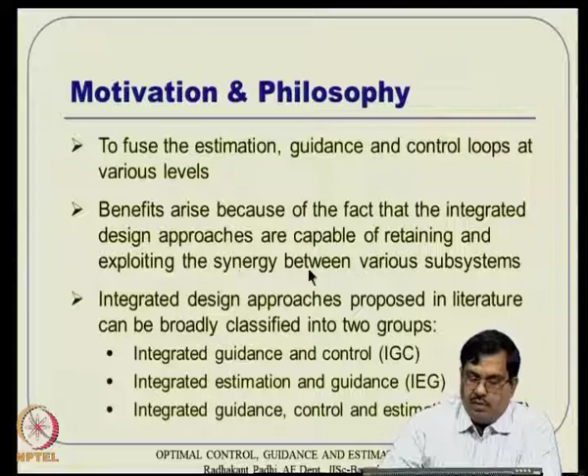So the motivation and philosophy is like this. What you are interested in is to fuse the estimation, guidance and control loops at various levels, and benefits arise because integrated design approaches are capable of retaining and exploiting the synergy between various subsystems. Ultimately it is finally one system. If you separate it out and put estimation, guidance as separate subsystems, everything has to act on the same system finally, and if you do not exploit the synergy between them, unnecessarily there are transient effects, large delay effects, things like that. So can we suppress some of those by invoking some of these concepts?

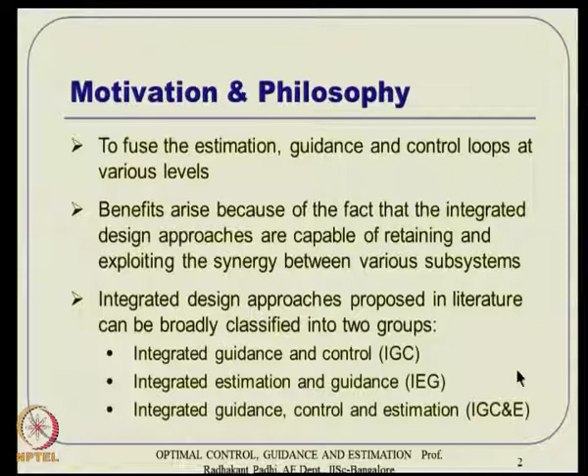So the integrated design approaches proposed in literature can be broadly classified into two groups, primarily integrated guidance and control, or integrated estimation and guidance. There are also concepts of integrated guidance, control and estimation together, and popularly some people call it IEGC, and some people call it IGC and E - integrated guidance, control and estimation. Anyway, so the concept is more important.

So let us see what is going on here. Typically, and these are largely in the context of missile guidance, though you can talk about other systems as well - we have actually experimented some of these concepts of IGC in UAVs and all that, but here the primary focus will be on missiles. So when you talk about missile guidance and control, you also need some information about the target. That target information is typically captured either through radar or seeker, so we have some sort of a target estimation loop, and this loop also talks about missile position and velocity vector.

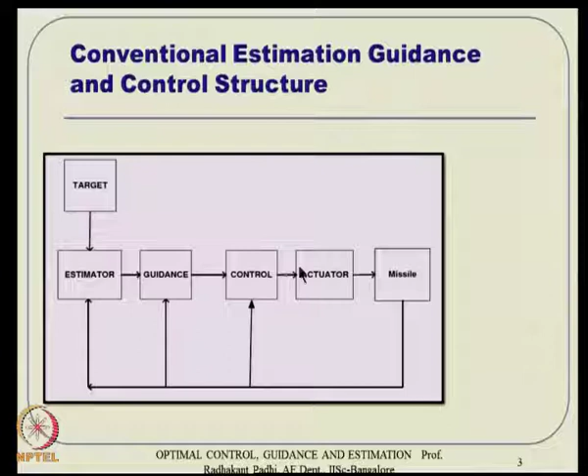So when somebody talks about estimation, he typically ignores everything inside guidance and control, like the actuator. When somebody talks about guidance, he ignores everything else, control similarly. So now the question is, can the time lag between various loops be reduced? Because the moment you talk about loops after loops, the inner loop should be sufficiently faster than the outer loop - in other words, the outer loop has to be sufficiently slower than the inner loop. So purposefully, if this actuator has some bandwidth, control design has to be slower than that, guidance has to be even slower, and the estimator has to be even further slower, in an error closing sense.

So the question here is, can we not do guidance and control together? Because guidance is typically done based on point mass or kinematics level to some extent, whereas control design is typically done using 6-DOF equations of motion. Now, if 6-DOF equations of motion are used in control design anyway, then 6-DOF contains the position and velocity information also. So why use separate dynamics for guidance and then invoke some approximate dynamics? That is probably not needed.

That whole idea - people have thought about it and tried to combine these two loops, and concepts of integrated guidance and control start appearing. Then some people think, well, we can also combine estimator and guidance, because guidance essentially talks about target information all the time.

So, estimation and guidance, why talk separately? We can talk together, and that leads to this integrated estimation and guidance. Some people talk about everything together.

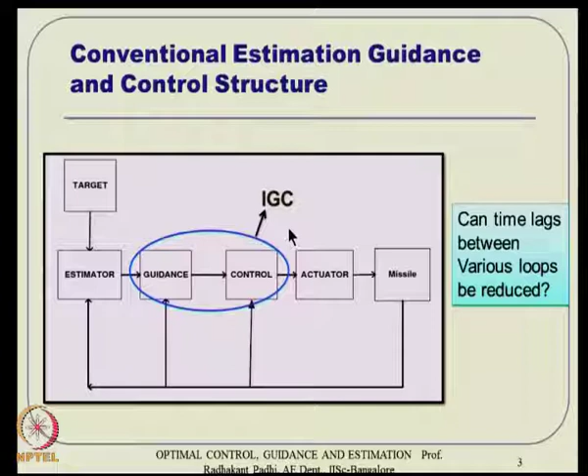But one of the concepts that has emanated from our own lab is what we call partial integrated guidance and control. That is what I am going to talk about in this lecture.

The primary references of this are several conference papers that appeared in 2009, interestingly in sequence in May, June, July and August 2009, covering various techniques and issues addressed and things like that. If you are really interested, I suggest you read some of these literatures for more detailed explanation. We are also in the process of writing some journal papers, but so far it has not appeared anywhere.

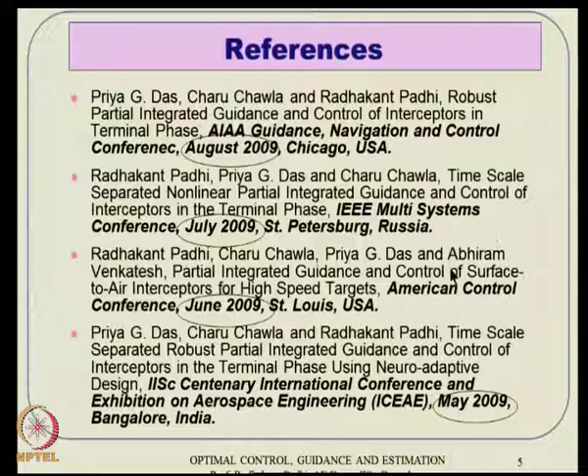Alright, so the outline of the talk for the subsequent part of this lecture is something like this. We give a very brief overview of conventional guidance and control, followed by the philosophy of IGC design, its merits and drawbacks at the philosophy level. We will not go into details inside.

Then we will switch over to the partial IGC concept, and take a typical real life example of endo-atmospheric interceptors engaging against incoming ballistic missiles. We assume the ballistic missile can only take a ballistic trajectory, not spiral motions and things like that. But still, we assume the target is some sort of ballistic re-entry vehicle with very high speed, and we have some sort of endo-atmospheric interceptor where we want to intercept it before it reaches the ground. So that is the type of problem.

Then we will follow with some numerical results. First the nominal case, and we will also give some comparison with conventional design as well as IGC design, and we will demonstrate that this partial IGC happens to be in some sense better than both.

Then we will address some practical difficulty issues: information availability, zero effort miss behavior, perturbations with respect to initial condition, computational time issues, implementation with seeker noise, and robustness with respect to parameter inaccuracy. All these happen to be very practical issues, and unless all these things are addressed sufficiently, it is not really a very good design.

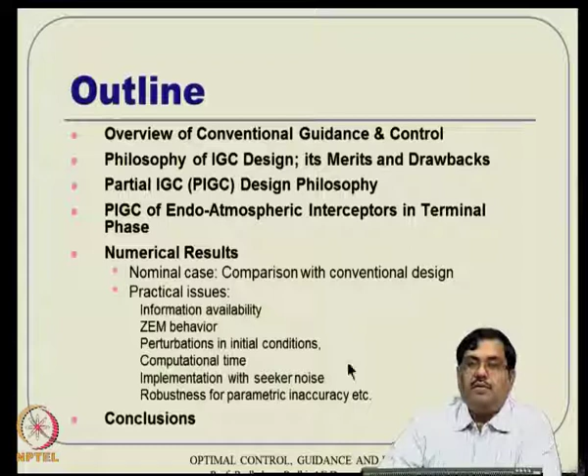So we will see some of these behaviors with respect to this, and then we will have some concluding statements.

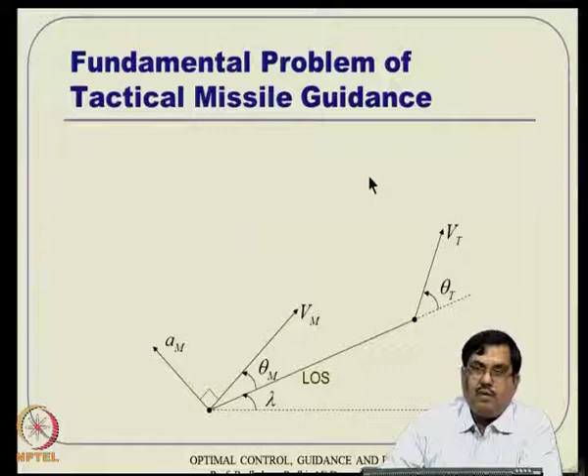Alright, so very quickly, what is the motivation and philosophy of partial IGC? This is a typical guidance scenario, and some of these are very clear from the guidance lecture as well. So we have a missile and a target going its own way, and the missile is chasing it.

If the missile continues to go in this direction, it may miss the target. So there will be some sort of direction correction, and the direction correction happens in such a way that the LOS vector does not rotate. It's a typical 2D picture, and ultimately the LOS vector does not rotate, finally leading to this collision triangle sort of thing.

There will be a slight path correction here, so that finally this vector gets in a slightly different direction, depending on what the target does.

And that is done typically through lift generation, and lift by mass is typically what is lateral acceleration, so AM. And AM, when you apply this lateral acceleration, this velocity vector gets a turning, and this is what happens.

So how this AM is generated is typically done through this very simple looking guidance law, which is N VM lambda dot, proportional navigation, and there are several variations of that. There's true proportional navigation, pure proportional navigation, augmented proportional navigation, modified proportional navigation, things like that. Various things are available. But the fundamental philosophy is like that.

If either AM is perpendicular to VM or AM is perpendicular to the LOS. If it is perpendicular to LOS, then it is something like VC. If it is perpendicular to velocity vector, it is VM. And there are again discussions in the literature about which one is better, depending on the situation.

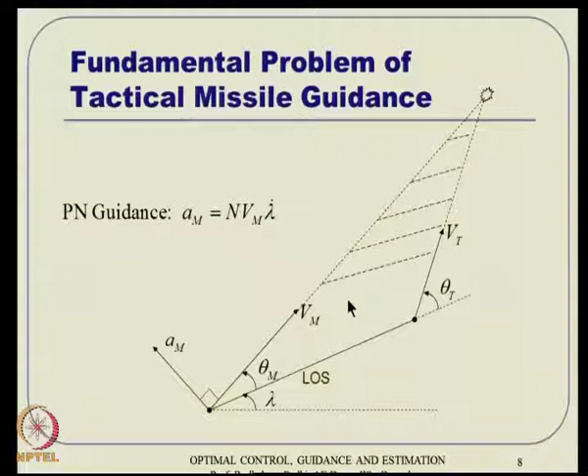So once you generate this lateral acceleration, that is the guidance command generation part of it. Then there is one more loop which will take this guidance command and convert it to an equivalent body rate command. So that is the body rate command generation.

Then you go to the inner loop, and it will take this rotational dynamics, in other words the P dot, Q dot, R dot equations, and use those equations to generate delta P, delta Y, delta roll, pitch and yaw. Then it will be fed through the actuator dynamics, and finally it will be fed to the missile dynamics, and then the vehicle gets course correction.

So what are the things here? First of all, it exploits the inherent timescale separation property. That's the very good part of it, because when we talk about guidance, we really don't worry so much about the body attitude. The orientation of the body doesn't matter. Ultimately what matters is taking the vehicle from point A to point B.

So in a point mass sense, that's the guidance problem. Very precisely, the guidance has to translate the CG of the vehicle to a desired location wherever the target is. So we typically separate out the body rate part and things like that. What happens is body rates are typically fast dynamics, whereas at the velocity vector level, that u dot, v dot, w dot component level, or even point mass dynamics level, the equations are slow.

In other words, it takes some time to evolve. So this timescale separation property between faster and slower dynamics is typically retained here, which is very nice, and that is why the tuning difficulties are typically not there. So it's easy mechanization with relatively easy tuning, I would say.

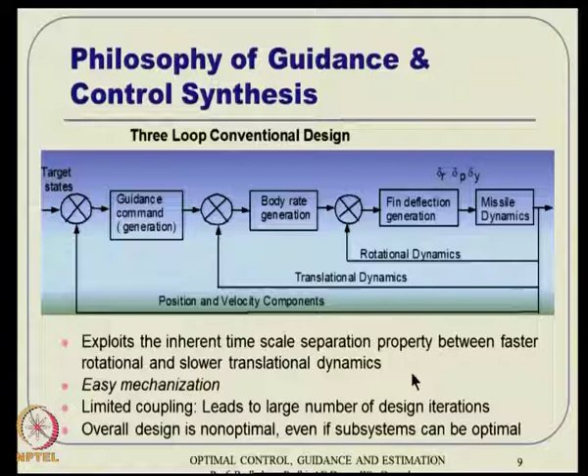But the drawback is the overall design is non-optimal, even if the subsystem becomes optimal. Also, this limited coupling, because of this point mass here, six DOF here, and things like that, leads to a large number of design iterations as well. So the good part is it exploits the timescale separation property, giving advantages including easy mechanization, but it has these drawbacks.

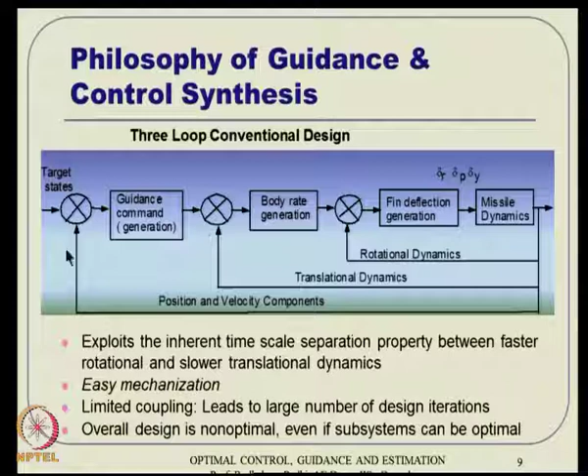So to address these drawbacks, let us understand what is going on here. So we have this outer loop, the outermost loop, the guidance generation part of it. Then there is a body rate generation. In other words, this, let's say, 1 can be assumed as the guidance loop.

And this intermediate loop has to track this command. So that means 2 has to track 1. And 3 has to track 2. So 3 has to go and merge with 2. That is how ultimately 3 goes to this reference command, the dotted line, finally.

So that is how you can think of understanding basically. But what happens here? Just some observations before we move on.

Many classical missile guidance laws are typically inspired from nature. Especially proportional navigation is inspired from the so-called collision triangle concept, typically geometrical behavior. Control theory based guidance laws are also there, but they typically take either kinematics or a linearized dynamics. So essentially they are not very effective.

In my own view, modern control theory, and especially nonlinear optimal control theory based guidance laws are a natural tool to obtain very effective missile guidance laws. The only constraint is probably the computational difficulty that bugged people for a long time. Can it be overcome actually?

What about autopilot design part? Again, autopilot design is also based on typical classical control theory like root locus, Bode plot, PID control, lead-lag compensator, things like that. Typically these are based on linearized, single input single output models. So essentially it takes a lot of effort and tuning to make it work.

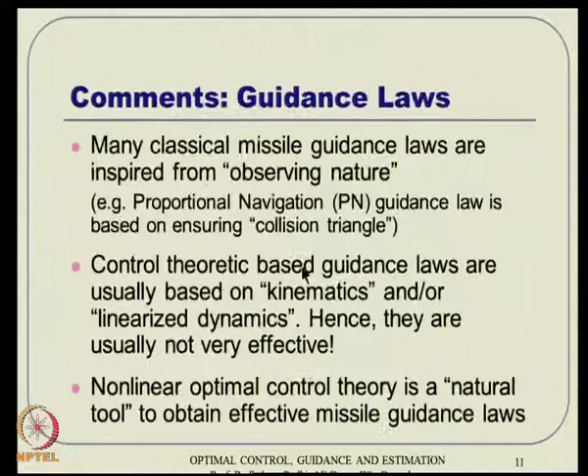Then it essentially leads to large overall loop delay, and this is not very good in time critical applications - that's my strong view. That means when time to go, T-go, is small, you don't have the luxury of a long settling time. I'll demonstrate this in the next slide probably.

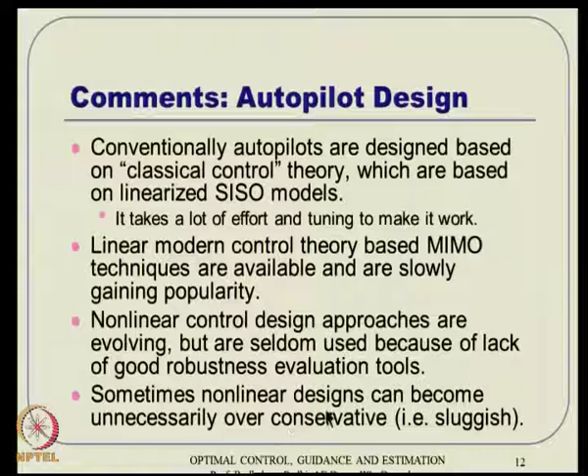So sometimes the nonlinear designs can become unnecessarily over conservative, as I already mentioned. The point is that it may result in large overall loop delay, and when T-go is small, that is not acceptable.

So the overall design approach is typically non-optimal and hence it requires a good amount of effort - a good amount of tuning effort to make it work near optimal. You can talk optimal, but if you really want it to work near optimal, you need a lot of tuning effort.

For this reason, people have thought about putting everything together in an IGC sense - integrated guidance and control - and asked, what about just one loop? Because every piece of information is contained - target information, inertial information we have. So simply do some math and generate the fin deflection directly.

Essentially this leads to the line of thought that it results in big advantages - synergy between guidance and control, optimal performance of the overall system, because there's no point mass equation anymore, everything happens at 6 DOF level, and there's essentially no lag between guidance and autopilot loop. Hence we expect some improvement in the miss distance as well. But what happens here?

So advantage-wise it is synergy between guidance and control, and optimal performance - yes. What is the drawback? In our own observation, it works, but it works only with small perturbation about the collision triangle.

Otherwise the tuning becomes quite difficult. Design tuning is difficult because of the conflict between problem objective and control effectiveness. The problem objective is to translate the CG from point A to point B, which happens to be the target position.

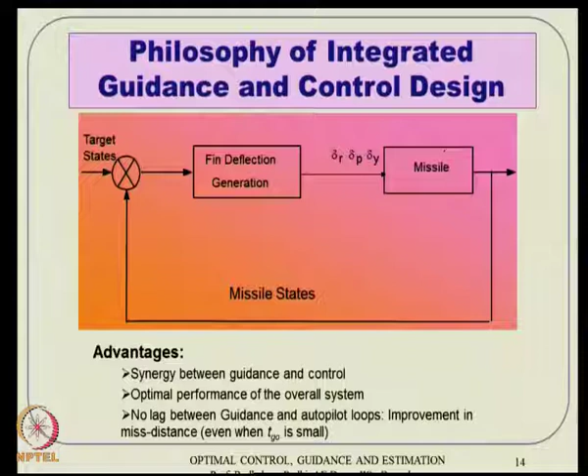We have to go through the moment level equation instead, then the tuning becomes very easy. So this is what is written here: control attempts to alter the translational dynamics directly rather than through the rotational dynamics. That is the whole observation. This causes the rotational dynamics to overcorrect, and hence the vehicle becomes unstable.

If you are not very careful about this fin deflection, what happens is it generates the fin deflection from a relatively less powerful component, and the deflection becomes larger. If it becomes larger, then at the rotational level its effectiveness is very high, so it rotates the vehicle further, and then it goes towards instability. So those are the drawbacks.

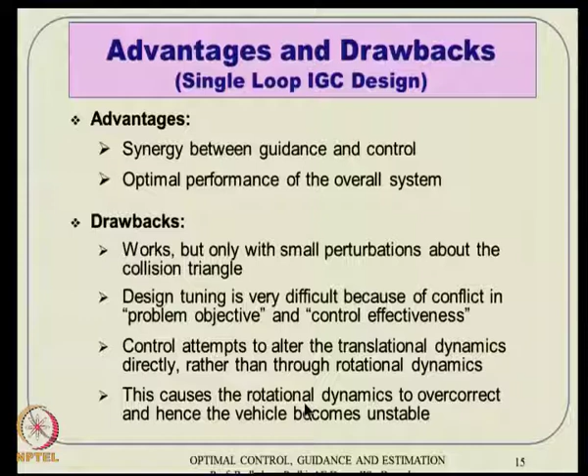So the motivation for partial IGC is like this: we want to retain the benefits of IGC, but overcome its drawbacks. The questions are: can the inherent timescale separation property between translational and rotational dynamics be preserved and exploited? We want to keep this property and exploit it as well. But the conflict between problem objective and control effectiveness has to be avoided.

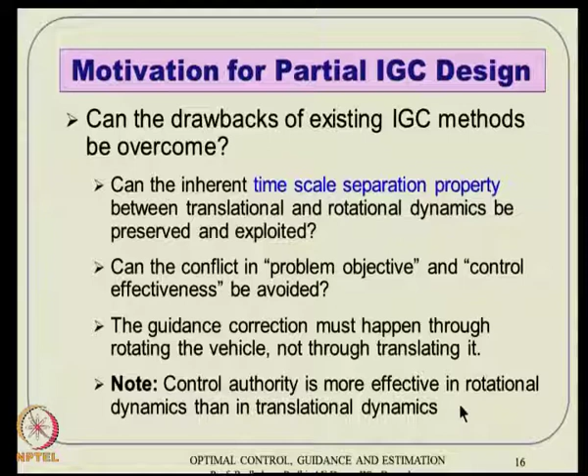In other words, the guidance correction must happen through the rotation of the vehicle and not through translation. So the point here is the control authority is more effective in rotational dynamics than translational dynamics, and hence that's the requirement.

So let's understand this concept again. We have this guidance loop followed by body rate generation followed by fin deflection. Guidance takes a long time, and let's say the settling time of the guidance loop is here. So the problem objective is achieved somewhere here. In other words, if your time availability is more than Ts, then probably the miss distance is very small, which is not a problem so much.

But we don't want to look at those problems. We want to look at cases where TGO is very small, especially when an incoming ballistic missile comes at very high speed. Even though separation distance is say 30 km, when the seeker opens up and sees the target, that 30 km distance is typically covered in 3, 4, 5 seconds. So that becomes a small TGO problem.

In those cases, we want to do something so that this outer loop is avoided. Remember, this innermost loop is capable of following the second loop, but by design the second loop has become quite slower because it has to track the guidance loop. That's the whole idea there.

Now let's get out of the guidance loop and directly talk about body rate generation. Can we do that? If we do, probably this body rate generation can try to catch up with the commanded value very fast, and hence the outer state will also catch up with that. That is what is reflected here.

So instead of having this kind of picture, we will have something like this instead. Essentially, initially our settling time was somewhere here, but by doing this we have been able to reduce the settling time significantly.

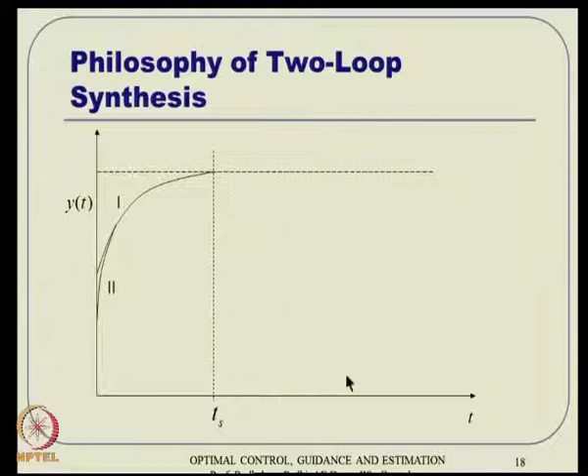So the idea is like this. We have this guidance, body rate, fin deflection and all. What we are telling here is come out of the typical guidance loop, and whatever is left out is what

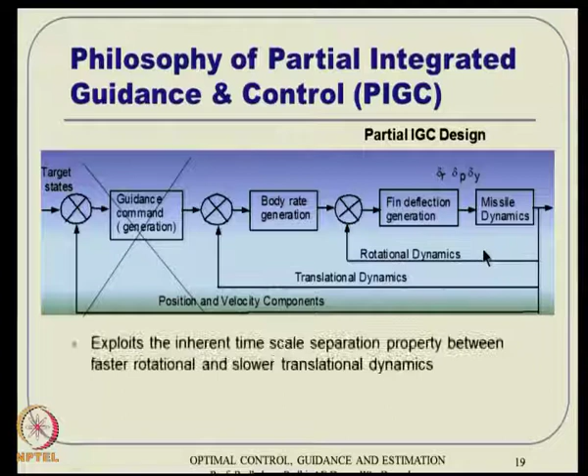we are calling partial IGC design. It exploits the inherent timescale separation property, and operates essentially in 2 loops. The commanded body rates are generated in the outer loop directly, and then using those commanded body rates we generate the fin deflections in the inner loop. That's the whole idea here.

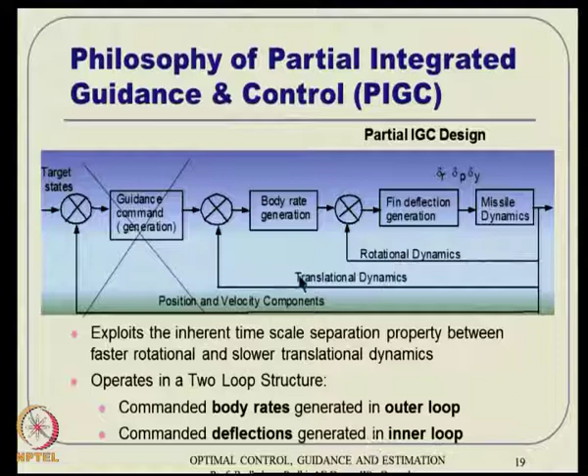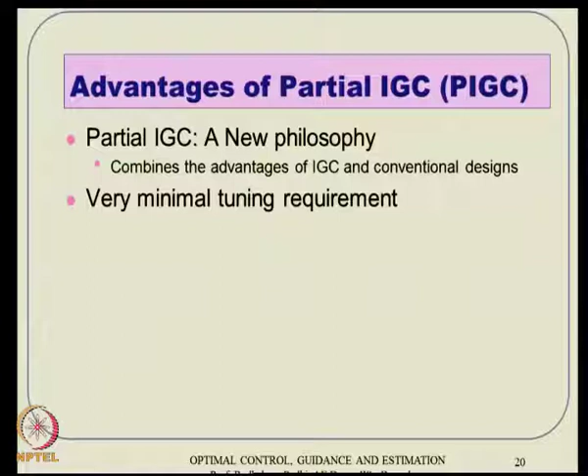So advantages, just to summarize: it's a new philosophy altogether that tries to combine the advantages of IGC and conventional design both. Very minimal tuning requirement, and that's a big fact in my view. If you see the IGC community and talk to them, most designs have this tuning difficulty, but in PIGC we really don't have this tuning difficulty. So very less computational time, because that is something we cannot avoid, otherwise all these nice concepts are useless.

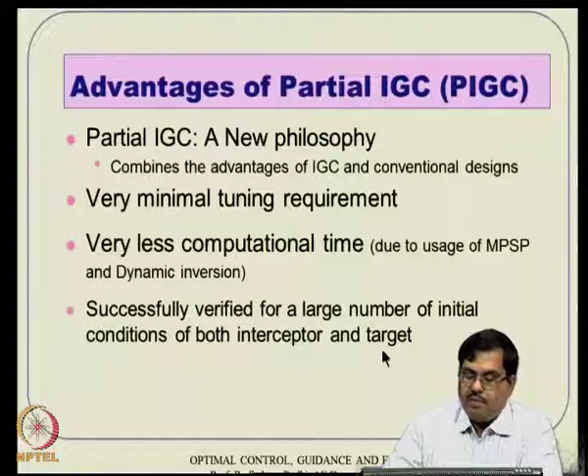So what we are doing here is in the outer loop we are proposing MPSP or MPSC, the 2 techniques we discussed before, and in the inner loop we are trying to use this dynamic inversion concept. This is a nonlinear control design approach. It has been successfully verified for a large number of initial conditions for both interceptor and target, and comparison between conventional 3-loop and SDRE based 1-loop design is also there.

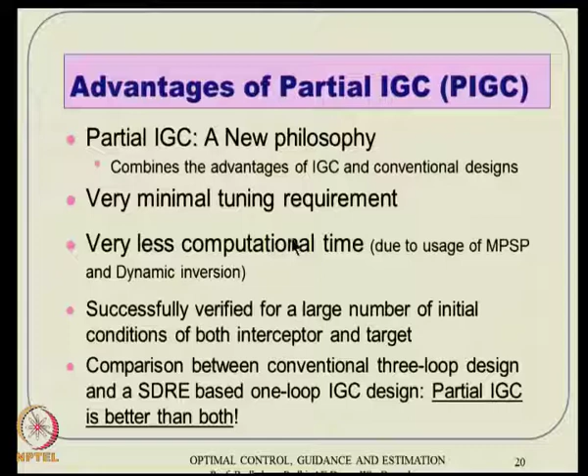So essentially the conclusion is that partial IGC happens to be better than both, but instead of simply telling in English words, we will also go through some results and see why it is happening. These concepts are available in some of these references, you can find more details there.

So implementation of this partial IGC is typically done this way. Remember, body rate generation, either MPSP or MPSC, whatever we are talking about, this one will have this Q star and R star available. So this Q star R star generation mechanism will give us the desired body rates Q star and R star.

To tell the story a little more here, whatever TGO we get from this PN law and things like that, initial guess - essentially the whole idea here is to nullify the errors in the two channels to two axes and then stick to that zero error. In other words, if your TGO is somewhere like this, your estimate can be somewhere here, but the real TGO can be very close to that.

So during this period, whatever period is left out, we can think of implementing some DI based guidance there, and that is why it is written MPSP, DI and all that. Up to here it is MPSP. Any small time that is left over, that means error has gone to 0 in two components, it needs to remain at 0 for the remaining time. So the remaining part is typically done through DI. Details you can see in the paper.

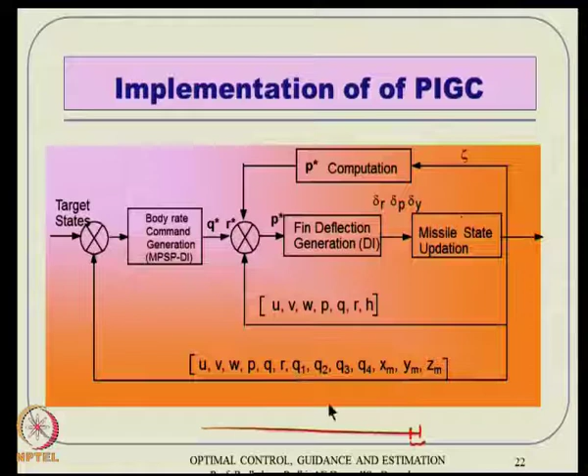Remember, the entire body rate command generation can be thought of like an outer loop guidance sense. So everywhere the full information is required, all the variables that go into the system equation have to be fed back, and this Q1, Q2, Q3, Q4 are typically quaternion components.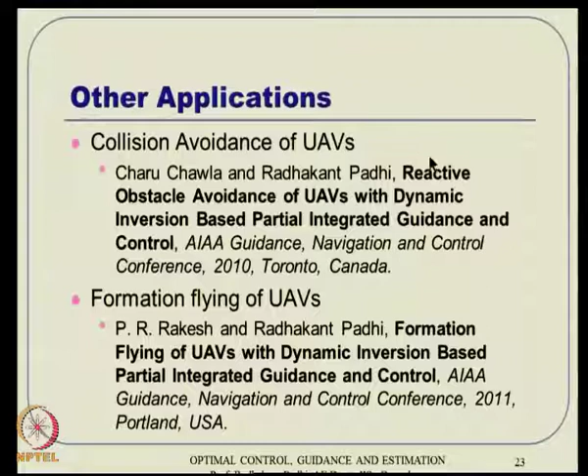There is nothing called MPSP, MPSC and all that way. Anyway, coming back to this particular problem, this partial IGC design for endoatmospheric interceptor for ballistic targets especially, let us move a little more onto that.

The challenges here are, first of all, very high speed targets, meaning very little engagement time, the time availability is very short. Also remember, very high line of sight rate - that's the fundamental thing for any guidance, no matter what technique you use. If your line of sight rate changes, you have to react very fast. So if your line of sight rate is high because the vehicle is going in some cross-plane sense while engaging - remember this picture, if it's going in some plane and you are engaging in some other plane - if that kind of situation happens, anything coming in at very high speed reflects in large LOS rates, and that generates a lot of difficulties.

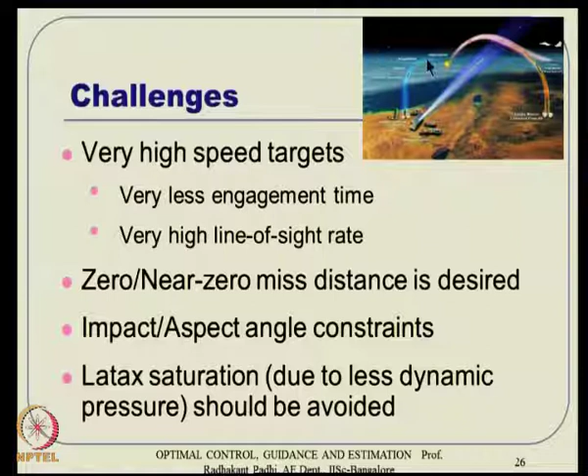And the drawback is we have this lateral acceleration saturation, because the dynamic pressure is less as you climb up and up. Once the dynamic pressure level drops down, obviously this engagement has to happen, and the difficulty comes in turning the vehicle. That's the whole idea. Alright, so a little bit of math here.

So this is the target, it has its own axis system. This is your line of sight. This is the vehicle or interceptor, missile, whatever we call it. It goes to engage the target.

So it has its own axis system, but this entire formulation, any guidance problem, has an inertial axis frame also, where you see the engagement. So the vehicle has its own body axis system, and it has an inertial axis frame. And then the entire equation of motion is given in the fin frame, which is typically rotated by 45 degrees about its own body axis.

And that fin frame, we are imagining one more fin frame sort of thing, located at the inertial frame center. That is just a mathematical formulation of the problem. So this is what you see, an inertially located fin frame. The orientation keeps changing but the position does not change for this frame, but for this other one, both position and orientation keep changing.

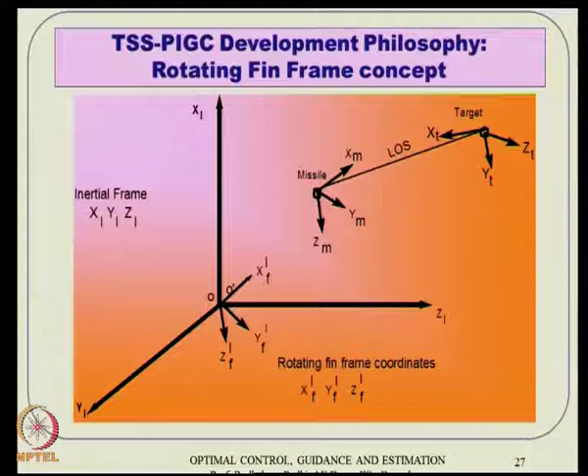And then if you go back to this kinematic level, you have these quaternion components, and then we are not talking about the position of the vehicle itself, but the relative position between the vehicle and the target. And this relative position is seen in this rotating fin frame. And when you have derivatives taken in a rotating frame, then this omega cross r term has to be accounted for, and doing all that, we end up with an equation like this.

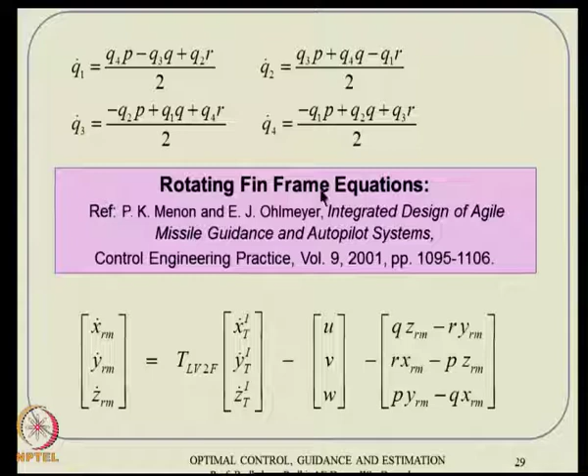So these equations, you have 6 here, 4 here, and 3 here, so 13 equations total, but we will also have a quaternion constraint equation, which is q1 squared plus q2 squared plus q3 squared plus q4 squared equals 1. So that algebraic constraint will also act on it. That is where the complete 6-DOF equation is given for this vehicle. More on this rotating fin frame concept one can see by going to this reference.

Alright, so the target model is typically a point mass model, because no sensors are available currently which can give the 6-DOF level detailed clarity of target dynamics, which is impossible with current technology. But we can certainly get the information at the point mass level, and typically that becomes sufficient. So this point mass level has 3 dynamic components and 3 kinematic components. Remember, everything happens in 3D, and there are also some assumptions about the target dynamics.

First of all, we assume endo-atmospheric engagement. We assume ballistic entry, meaning no lift, only drag. Then we have gravity turn accounted for, and no intentional and/or spiraling maneuvers, intentional or unintentional. Sometimes these spiraling maneuvers are unintentional also, because of the physics of the problem it happens that way. But that's the reality, I agree with that.

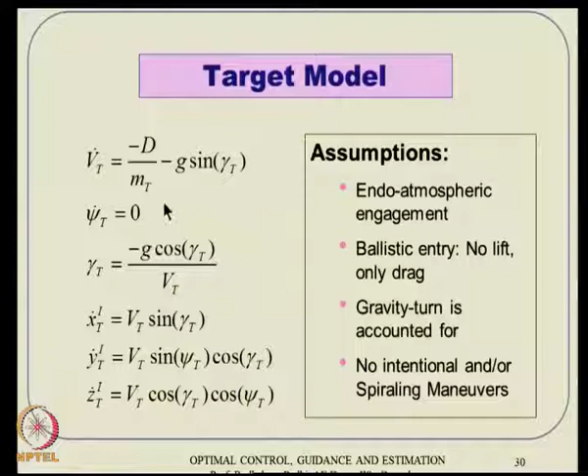But for this particular experiment, we are proposing a new concept altogether. So we thought, okay, we'll propose it with respect to non-spiraling targets, but it still has its drag, which is a major component. That is how it is defined. Anyway, so the philosophy of this time scale separated partial IGC is something like this, we have already talked about that.

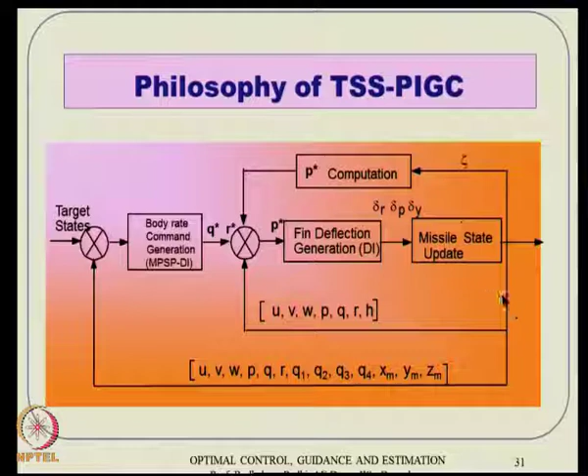Advantages of using this technique in the outer loop: it has a hard constraint formulation, meaning zero miss distance is something we can now aim for, since we have a technique which can achieve that. We also have a minimum control effort formulation. It has a closed form control update, so computational time is less, and it can essentially be implemented online. Compared to MPSP and MPSC, MPSC has a little more advantage in that control smoothness is guaranteed by formulation, and it is computationally slightly more efficient than MPSP.

So then for outer loop design, we have taken all these things, U, V, W, P, remember Q and R are control variables here, and P happens to be a time varying parameter. These are the states considered in the outer loop, and these are the controls assumed in the outer loop.

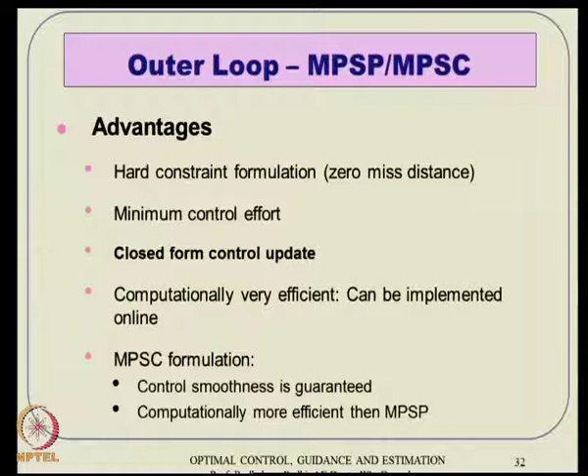So the output vector turns out to be like this, within the framework of this particular design. You need the state dynamics and the output vector to reach some desired output values as t goes to Tf. These outputs are typically YRM and ZRM, the relative dynamics in the inertially located fin frame in the y and z directions, which have to go to 0, and the relative velocity in the y and z directions would also go to 0. That's the formulation.

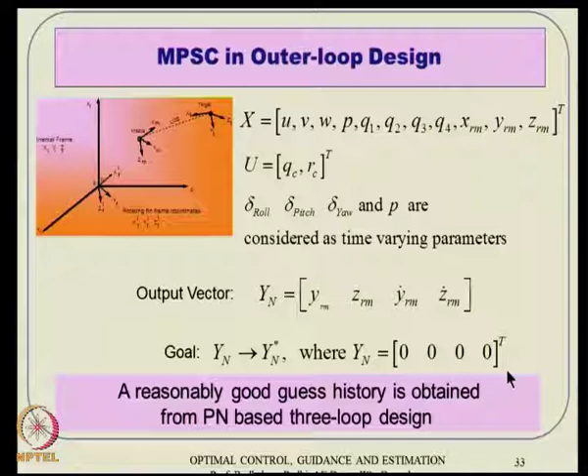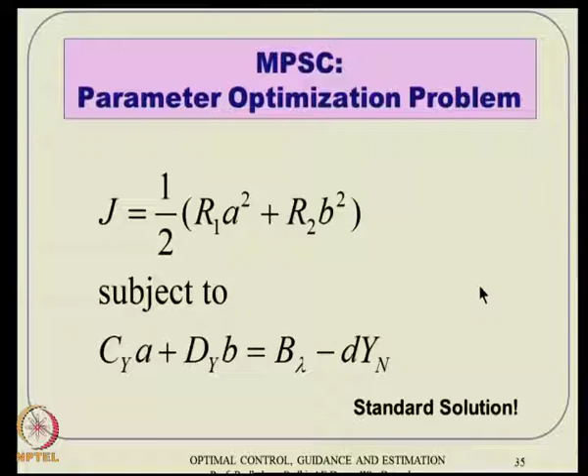These techniques also require some sort of a guess history, so we thought of implementing a PN based three-loop design and took the guess history from there. We talked about this design before, we have a linear parameterization and then this constraint equation. The detailed math is already discussed, so I won't talk about it here, but essentially it's operating based on the same technique.

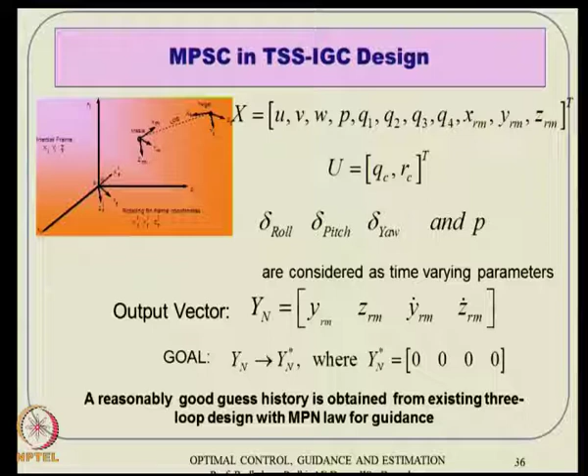These are the desired vectors, 0, 0, 0, 0. This is the actual vehicle parameter, and this is the desired vehicle parameter when t goes to Tf. We implemented everything with respect to a three-loop design based on this modified PN law followed by dynamic inversion control synthesis. That gives us a guess history to start with, and also a platform to compare our results against.

Coming to the inner loop control, we have fin deflections and inner loop outputs, and in formulation terms, y should go to y star in the dynamic inversion sense. So we define this error and enforce this error dynamics, where K is a diagonal matrix with diagonal entries being 1 over tau.

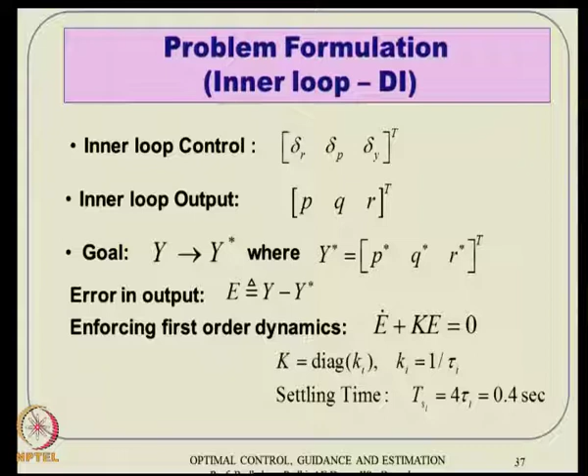Remember, the settling time assumed is 0.4 seconds, so less than half a second, we want the settling time to happen in the inner loop. The outer loop can close in about 3 to 4 times that, so around 1.5 to 2 seconds we expect the error to settle. So any time-to-go more than 2 seconds, we will probably be able to handle. That's the whole idea here.

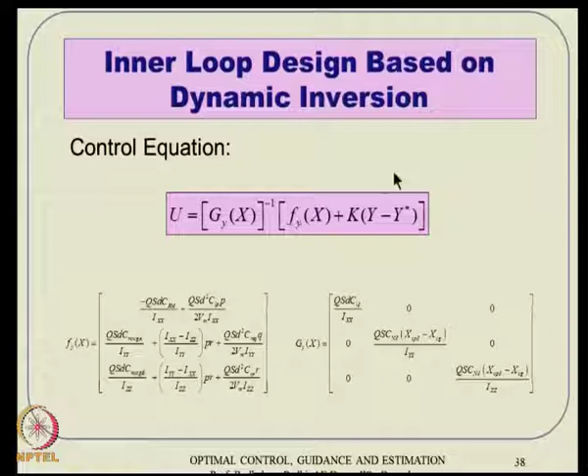The control update equation is in closed form. Those of you who don't know dynamic inversion, I encourage you to see one of my lectures in the previous parallel course on advanced control in this NPTEL program, where you can see why these dynamics come out like this. Details can also be found in the papers.

Some simulation results, this is what it is. We have the target coming in, see ballistic targets typically come in a straight line sense because there is no maneuver there.

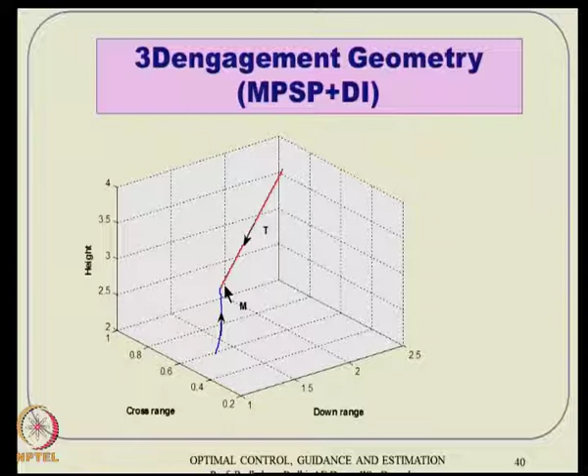The speed at various locations are different because drag is there. Typically the target is coming and the missile is going and engaging here, so you can picture really the zero miss distance. We will see the values also basically that way.

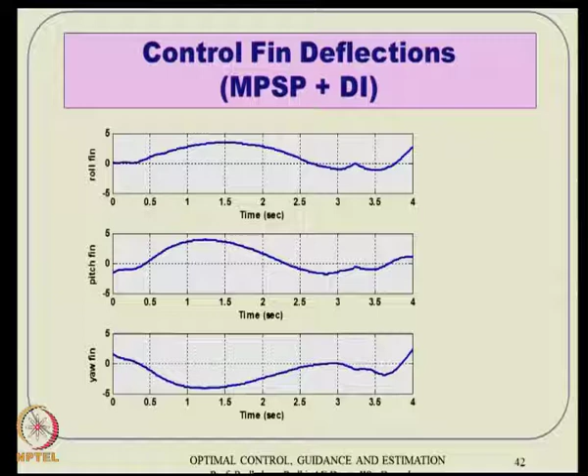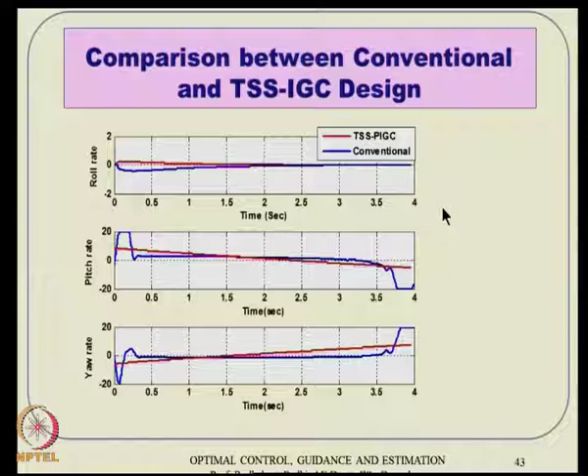Because here we have purposefully bounded it to the 20 degree per second limit, and that is why it is stabilized there. We are not allowing it; if you allow it, it will go a lot higher than that. So that is avoided completely in this new formulation.

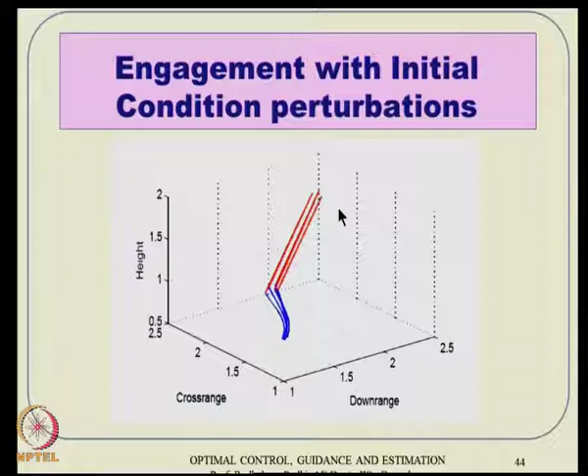And engagement with different initial conditions, we have tried out for several cases. Once you tune it, just forget it, you just keep on changing the initial condition and run your program. So that is what is done here. You can see various initial conditions for the missile, various initial conditions for the target also, both in position as well as distance. No matter what, it is able to engage the target.

But again, this SDRE technique is a little bit of a funny technique, it depends on SDC and things like that, so we do not claim too much into that. What we claim is, to the best of our ability and tuning, this is what the results that we got. And typically, if the design methodology is good, then it should not be based on designer's experience and things like that, so that is what a good method will demand, will result in basically.

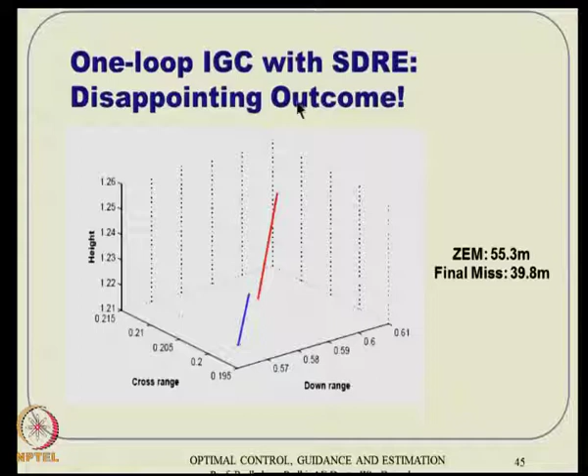So without claiming too much, what we claim is, in our best effort, if the miss distance, the initial zero effort miss without doing anything, happens to be on the order of 50-60 meters, then some correction may happen, but this is nowhere close to what we really want. So in our experience, this one loop IGC was a complete failure in some sense.

If initial conditions are such that the initial zero effort miss is of the order of half a kilometer, it does not work. It does not correct the error at all actually.

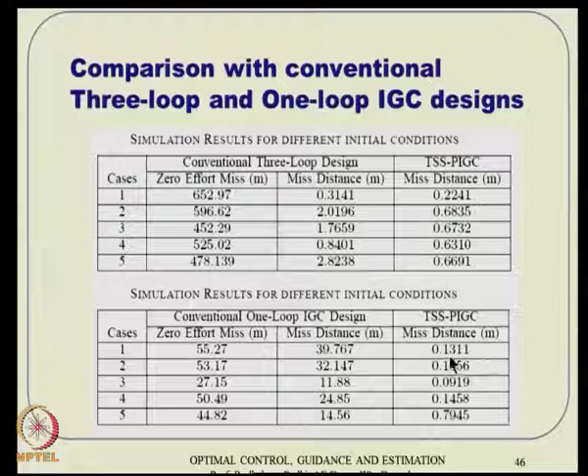Coming back, if this happens at least, there is some correction. 55 becomes 39, 53 becomes 32, 27 becomes 11 like that. But nowhere close to the less than 1 meter level accuracy you get here. So that is the more important part of it.

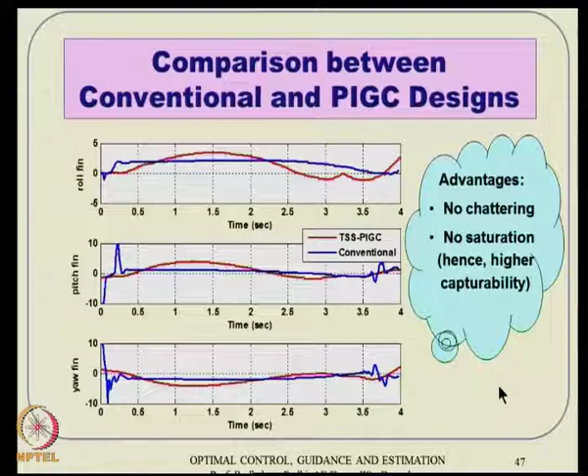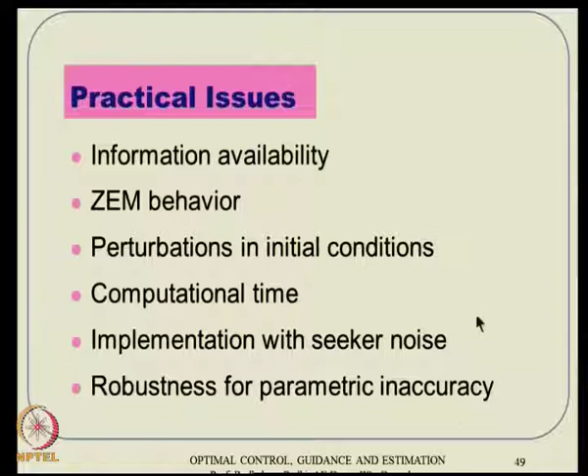Now coming to some real quick practical issues, as I told in the beginning, there are issues like information availability - receiving so much information feedback, are they available or not? Then there are ZEM behavior, zero effort miss behavior, finally what happens there? Then perturbation in initial conditions, computational time issue, implementation with seeker noise, and robustness with parameter inaccuracy. So these questions are like that, put in a question framework sort of thing.

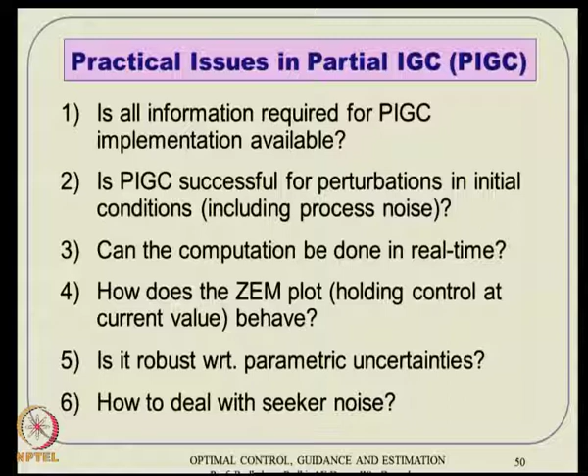So the information availability issue sense, what you are thinking is, okay, all these things are required for implementing actually. Now the good thing is this UVW and quaternion components as well as position, these are all available from the INS system. And the INS system is typically very good - you do not really need a filter in the loop, you can blindly rely on this information.

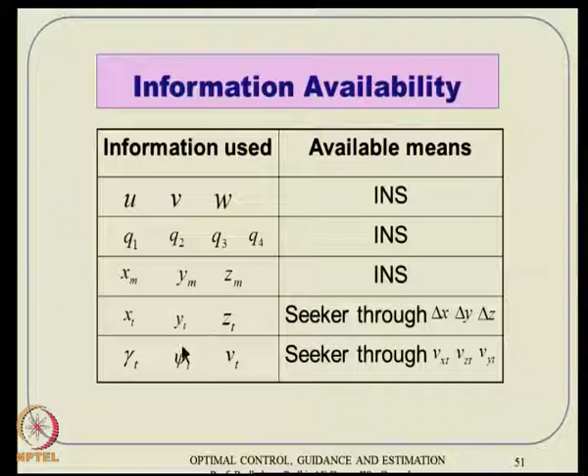Now we also need target position and target velocity vector direction and all that. That is typically available through some sort of seeker information. But also remember, anytime we want this information, we have to utilize some sort of filter design, typically done through Kalman filtering. So that part we are not talking about here - remember we are fusing guidance and control, we are not touching the estimation loop. But typically these informations are also used in whatever best possible way for the conventional design. Probably the same thing can be thought about to extract this information and then couple with that.

What about ZEM behavior? If you see the conventional loop, there is a lot of chattering here initially. This is the real reason why you require lot of battery power consumption and things like that. Your delta dot requirements will reflect in all sort of things. But anyway, we will not go too much into detail.

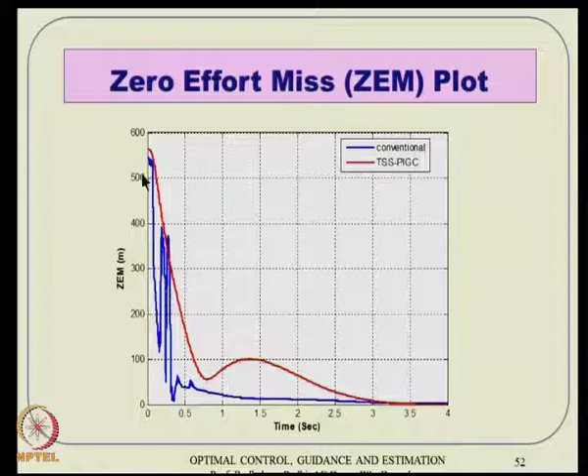Now what to do with the robustness part of it? There are some issues like sensitivity with respect to modeling or parameter inaccuracy, things like that. So for that part, we propose that you can incorporate this neuroadaptive design in the inner loop basically. This means the rotational dynamics where you generate the fin deflection - if that is done properly, everything else will be taken care of, and that is typically done through this neuroadaptive design.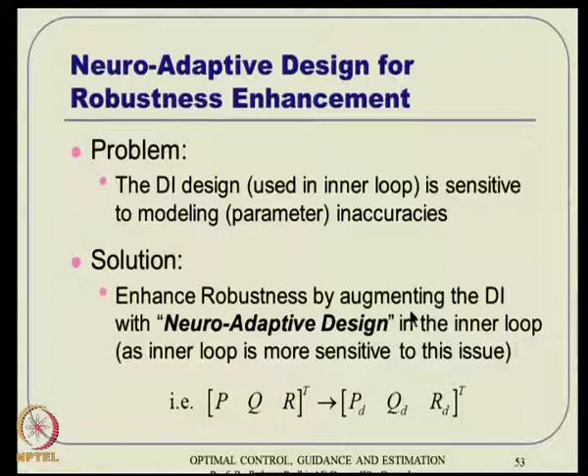What is the philosophy there? We have this P dot, Q dot, R dot, or this YD dot sort of thing - this is the desired dynamics, and this dynamics can be thought about without any perturbation, without any accuracy issues. But the actual output dynamics is different - it has this disturbance term. In other words, this gets generated from parameter inaccuracy and things like that, and it happens to be a kind of critical issue for any aerodynamically controlled vehicle.

Because aerodynamics will always be kind of tabulated data, and the confidence level will be fairly good, but you expect some 10-20% error all the time. That is the part which will result in this dy, and also if you have some neglected dynamics and things like that, it also appears in the form like this. So the concept here is, okay, we know these two.

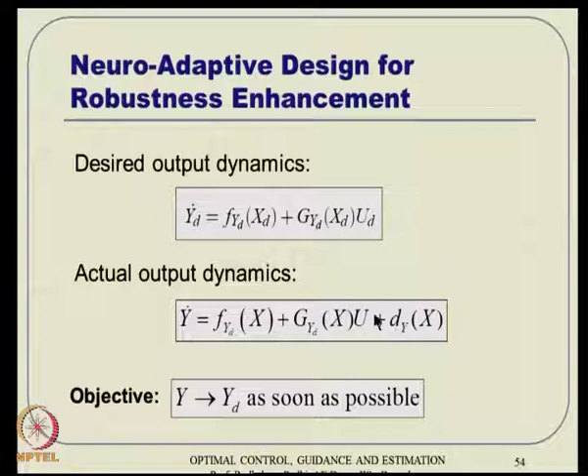So the idea is, can we make y go to yd very quickly? This cannot be done directly because this part is not known. So the whole idea is, can we know it first? And that is typically done through some neural network approximation. Whatever you do not know, we attempt to approximate using a neural network.

And there is some additional term for making it a completely observer-dynamic sort of thing. This term helps us in having smaller bounds and things like that. Those of you who are interested can see the 2009 GNC paper, the AIAA GNC paper, for more details.

The whole idea is once you put it here, this term is an approximation to the neural network, and this additional term is there. This is not the same as anything like this, but our objective lies here. So typically it is done in two ways: y should go to ya, and ya should go to yd, that is the design.

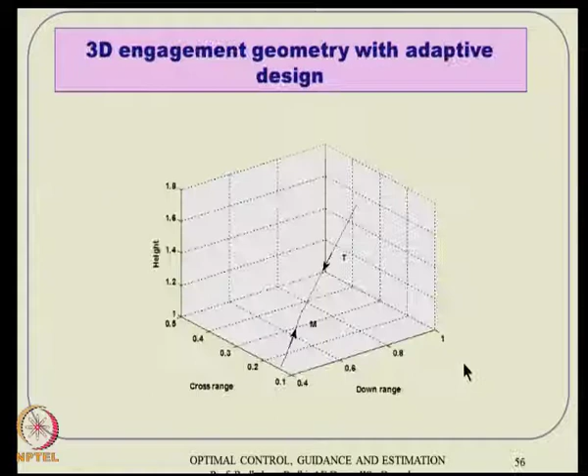Now these are the perturbations we have discussed - the parameters that greatly affect the vehicle dynamics. We have taken some nominal values and a minimum-maximum sense. You can see that if the nominal design is degraded - earlier it was all sub-meter level accuracy, within 1 meter - now with parameter inaccuracy like that, the same thing will result in a higher miss distance, 30 meters, 40 meters.

But if you put the adaptive control back into action, it again comes back within 1-2 meters, maximum 2.809 meters. So you can see the number difference, and you can easily claim that there is a substantial enhancement of robustness in the miss distance sense directly.

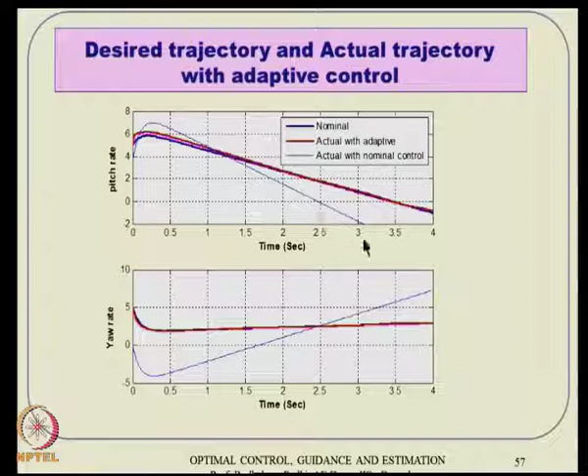It is not that the vehicle is getting fragmented or its roll rate is very high, or it has gone unstable. Even though it may operate in a somewhat stable manner, it is going somewhere else, not towards the target - that is the whole difficulty. We cannot afford to have 10 meter, 30 meter, 40 meter miss distance, this problem does not allow that. We need 0 miss distance, or something very close to 0.

And also remember, when somebody calls it 0 miss distance, it's not physically 0 - it's between the relative radius of the target and the radius of the missile. If you take them together, any number below that can be considered as 0 miss distance, because it will then result in a physical hit.

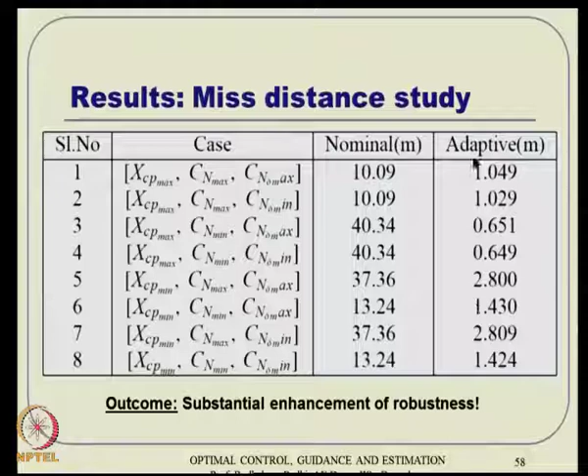So anything that is typically less than 1 to 2 meters, depending on target and missile radius, we can think of as near-zero miss distance. Within 1 to 3 meters, we can think around that figure as near-zero miss distance. That is what is happening here after we put the adaptive control back.

Now there is another issue that bugs us: how to deal with seeker noise. No matter what Kalman filter, EKF, UKF, whatever you put, there will be some residual error. No filter ever filters out the noise totally. So there will be some degree of inaccuracy in the output of the filter, and remember these are all predictive logics, MPSP, MPSC and so on.

So any amount of velocity direction error sitting there will result in a lot of repercussions. If you are aiming, let me show pictorially: there is a target here, your estimation tells there is something here, but if you have a small error in the angle, it may come out to be something there. So your vehicle will typically go towards that, whereas the real target is somewhere here. That is the difficulty. If the real target is somewhere here, your guidance should be taking you towards that, not the other one. But as far as information content goes, it is telling you it's going in that direction, so obviously the missile gets misguided in a way. So how do we handle that issue?

So the idea is: prediction of the target trajectory is done with seeker output averaging over a finite window. I'll demonstrate that in a picture. You take a finite window and do some averaging of whatever value you are getting over a period of time, then slide that window and keep operating based on that.

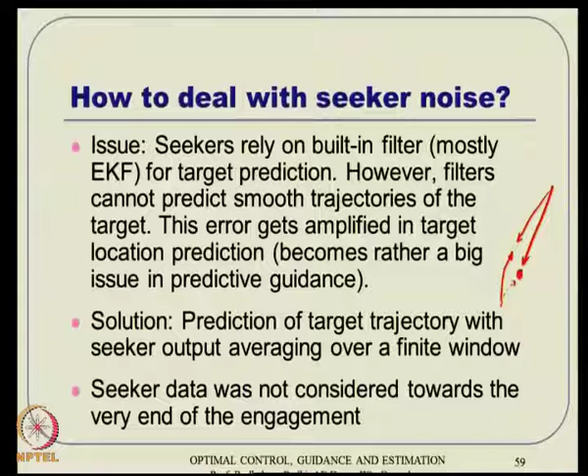Anyway, coming back, this is what is done. Remember 25 milliseconds is what you've assumed for the seeker update data. So first 5 data points we simply observe, we will not react - the guidance correction will not happen. We will simply observe what the target is doing, which direction it is going. And when this guidance loop closure happens at TG, we already have at least some finite window of data sampling, some 4-5 data points, depending on what level of mechanization you want.

So here, suppose T0 has given some information, we will project it to T4. T1 has given some information, we project it to T4, T2 gives something, project again to T4, like T3 to T4, and T4 itself we have got some data. So everything you are getting at T4, you try to average it out. In this case everything adds up and then divide by 5. That will be much better information compared to what we have got only at T4, because this noise averaging is not happening otherwise.

And then from T4 to some finite window, we'll keep accumulating - so that means up to here it's T0 to T4. Then as we go forward, we'll have these 5 data points, one more data averaging, then one more data accumulates. After a while we cannot keep accumulating because there will be too many data points. It also makes sense to remember the most recent data rather than getting reacted to data that appeared very far away. We don't want to do that because recent data is supposed to be much more accurate.

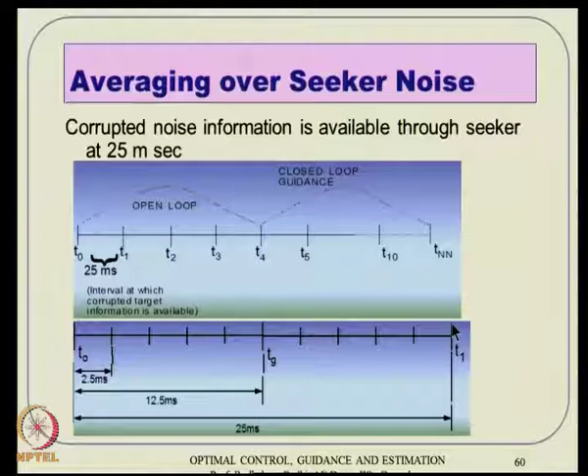This is all explained in words. There are two types of averaging: first open loop, then closed loop, and these pictures will show it. There will be open loop, accumulated averaging from T0 to T9, and then sliding averaging in operation.

This operation ceases a little before the real T-go, because towards the end, if the data hasn't been corrected by that time, there's very little time left to do anything. So it doesn't do a very good job after that. So we leave out some time before TF where we simply operate in prediction mode.

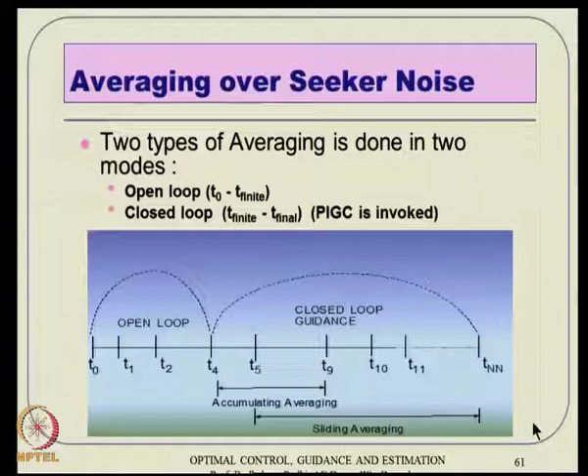Towards the end, remember, from here to here there is no further information. We just operate based on the prediction mode.

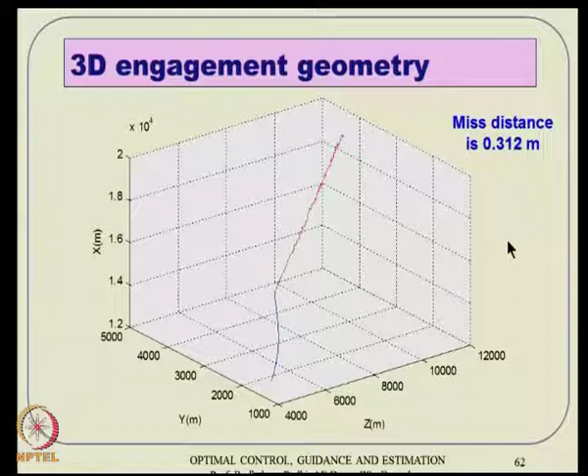In this kind of logic, the miss distance happens to be 0.3 meters, very small. If you look at the averaging and different values of the miss distance, these are various cases. We take various random cases and average it out to see what happens in some Monte Carlo sense.

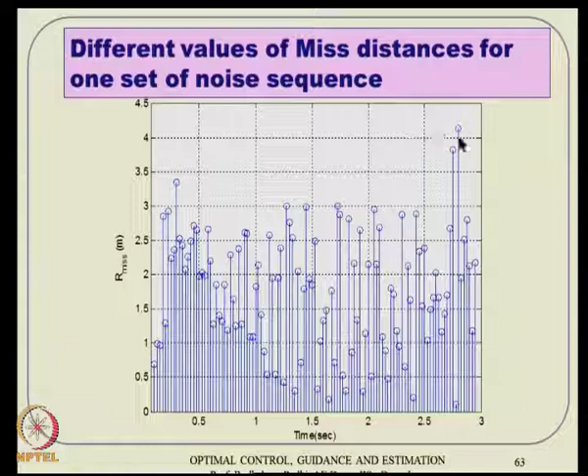You can see the maximum miss distance we obtain is about 4 meters, which is very small. So in conclusion, partial IGC is some sort of a new philosophy.

Essentially, the inherent timescale separation property between translational and rotational dynamics is exploited, and this leads to better performance with lesser and smoother control effort. With minimum control effort, a very small miss distance is obtained.

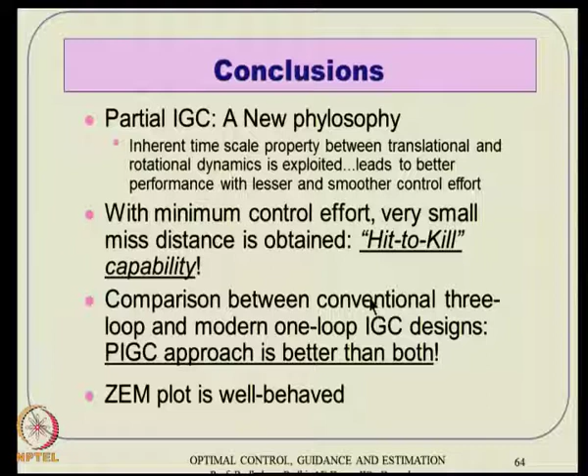That means it results in some sort of hit-to-kill capability of the vehicle, and our claim is it is better than both conventional design and one-loop IGC designs. Also, the ZEM plot is very well behaved, and the information required for implementation is available and successfully verified for different perturbation cases, without any separate case-to-case tuning.

If someone thinks this MPSP/MPSC cannot be used as such because it still operates on iterations, you can still have some finite iteration operation. We experimented with just one iteration at a time, and the results were very good. So essentially it leads to much less computational time as well.

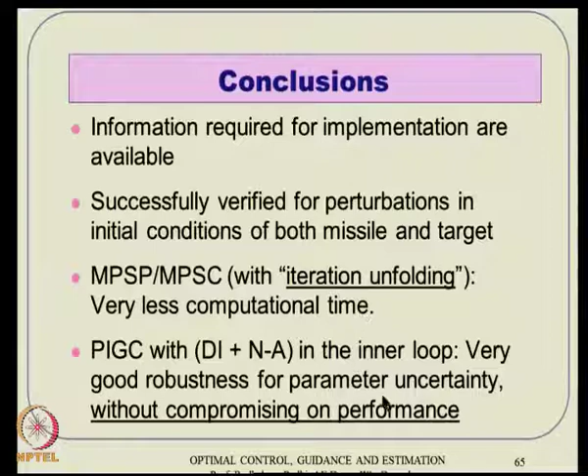So the summary is PIGC with DI and NA in the inner loop—this neuroadaptive element in the inner loop also gives us a lot of robustness for parameter uncertainty, without compromising on performance too much. The references are like this.